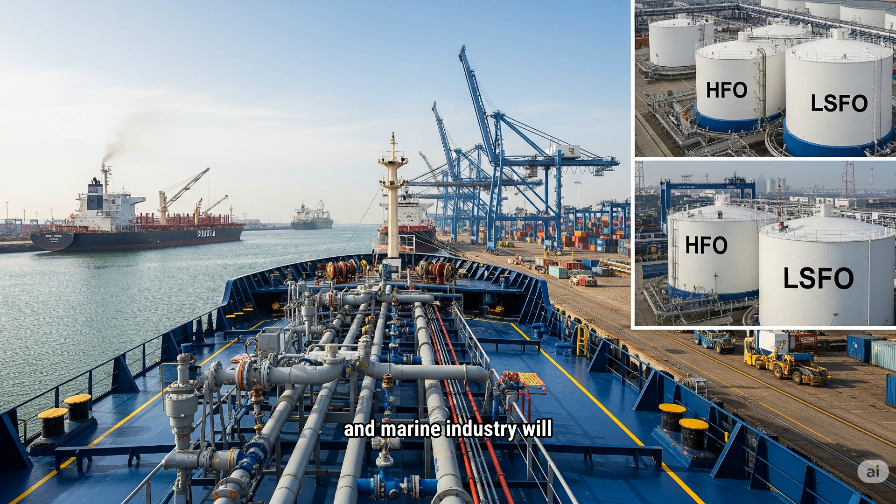The marine industry will go into a major change sooner or later, as a response to the continuous change of environmental rules and regulations. Therefore, the marine industry, among other industries, must respond and adapt to the changing and stricter regulations and become more efficient with regard to fuel consumption and emissions.

Many companies are researching and developing new types of fuels in liaison with engine manufacturers and shipyards. Some engine manufacturers strive to adapt and retrofit their existing engines to the new fuels when possible, as it proves more economically practical. However, new-built vessels will have to be equipped with newly designed and versatile engines, which can use dual fuels or new different types of fuels.

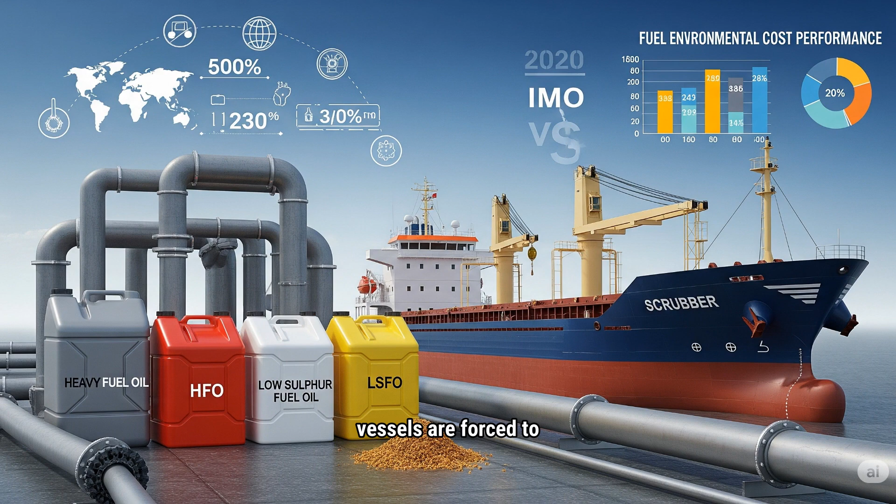After the 2020 sulfur cap compliance regulation, all conventional vessels are forced to use HFO plus scrubber or LSFO, and these fuels perform well on most parameters. There were some concerns about the availability of these fuels after 2020, but they are still significantly more available than alternative fuels. The primary disadvantage of these fuels is their low environmental performance.

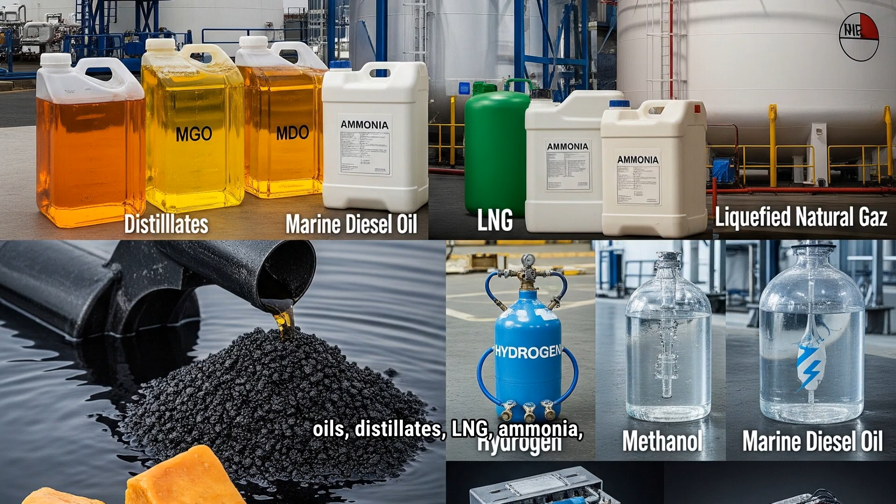Marine fuels comprise heavy fuel oils, distillates, LNG, ammonia, hydrogen, methanol, fuel cells, and others. In the case of distillates, a distinction is made between marine gas oil, MGO, and marine diesel oil, MDO. Residual fuel oil accounts for the vast majority of fuel oil used by the world's merchant fleet.

This also applies to the vast majority of large diesel engines used on land. By definition, residual fuel oils are byproducts of refinery processes that remain after the distillate or lighter fractions have been removed. These residues are complex mixtures that vary depending on the source of the crude oils processed.

Scrubbers incur high investment and operating costs, but these are negligible in comparison to the costs of alternative fuels.

Fuel oil was initially derived from the residue of the atmospheric or vacuum distillation process in the early days of refining. By and large, the product entering the market for fuel oil was of consistent quality, with few issues.

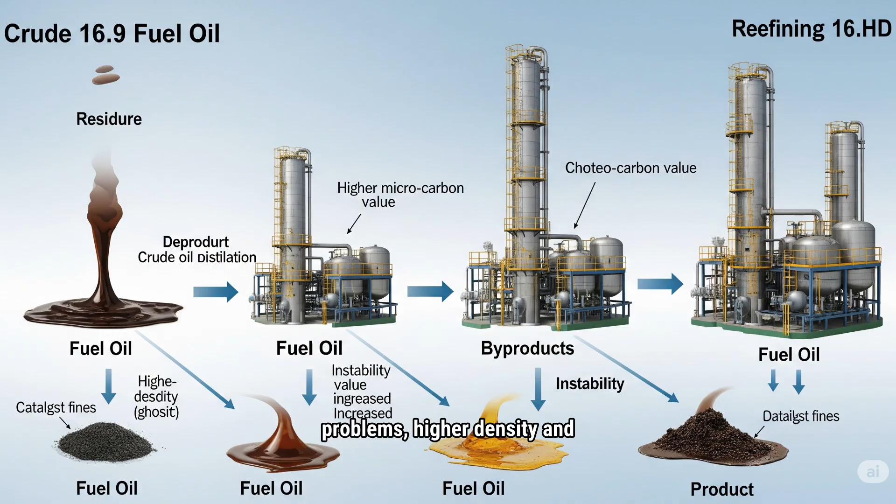As demand for distillate products increased, refiners implemented secondary refining processes, altering the market characteristics of fuel oil. These secondary refining processes have side effects like a lesser amount of residual fuel, higher microcarbon value, stability and sediment problems, higher density, and catalyst fines contamination problems.

Individual country-specific product demand is extremely diverse and cannot be met solely through crude oil selection due to the sheer volume required. Additionally, within a single geographical area, a variety of crude oil sources and refinery process configurations are used. As a result, fuel for industrial and marine markets exhibits considerable variation in its properties on a global scale. While this has been the case throughout history, the variations can be more pronounced than in the past.

The first step in the manufacture of petroleum products is the atmospheric distillation of crude oil into its major fractions. When crude oil is heated, the lightest, most volatile hydrocarbons evaporate first, followed by the heaviest, least volatile hydrocarbons. After cooling, the vapors are condensed back into liquids.

A fractionating column is used to carry out this distillation process. The column is divided into chambers by perforated trays that condense the vapors and allow the liquids to flow into storage tanks at each stage. The crude oil is preheated to a maximum of 350 degrees to avoid thermal cracking.

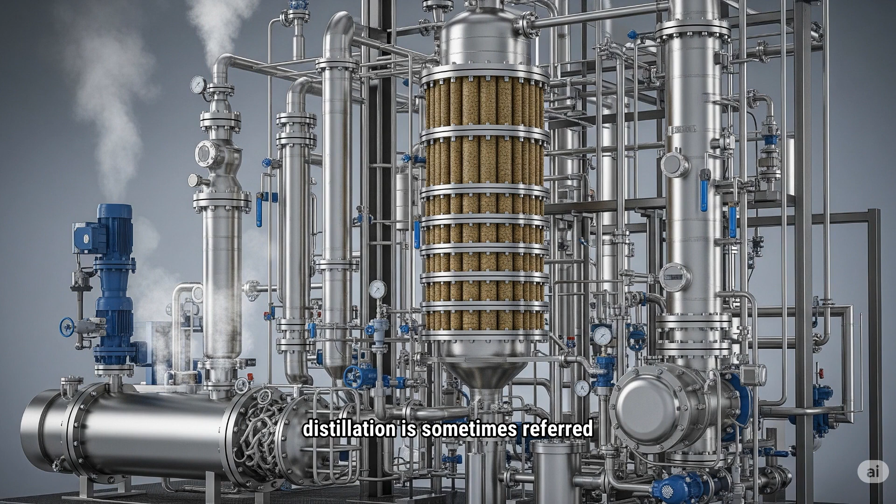The residue from atmospheric distillation is sometimes referred to as long residue, and additional distillation at reduced pressure and high temperature is used to recover more distillate product. This vacuum distillation process is critical for optimizing crude oil upgrading.

The vacuum distillation residue, sometimes referred to as short residue, is used as feedstock for further processing or as a component of a fuel. Unlike the fractionating column used in atmospheric distillation, the low-pressure vapors are condensed using a system of packed beds rather than trays.

Refineries that rely solely on atmospheric and vacuum distillation are referred to as straight-run refineries, and the fuel oil produced is essentially either long or short-run residue. The residue percentage varies according to the composition of the crude processed.

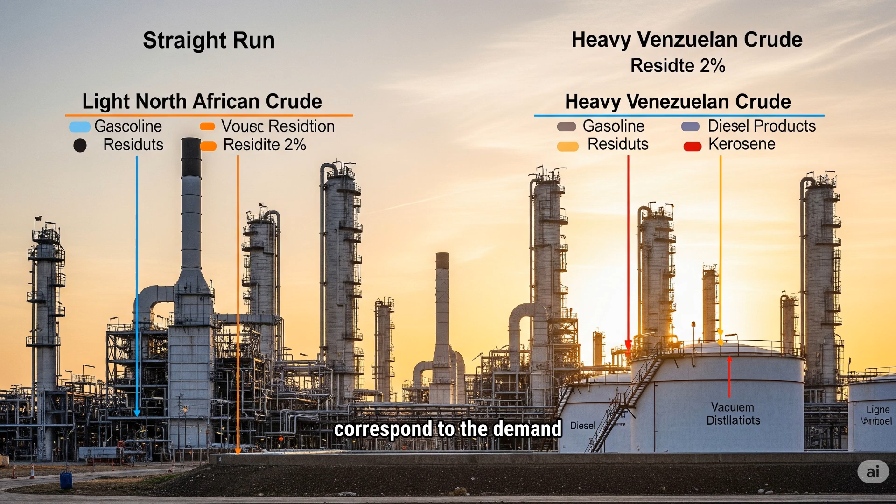The residue is 28% for a typical light North African crude and up to 85% for a heavy Venezuelan crude. The proportion of products produced does not always correspond to the demand for them and is largely determined by the crude oil. Here is an illustration of a typical refinery process.

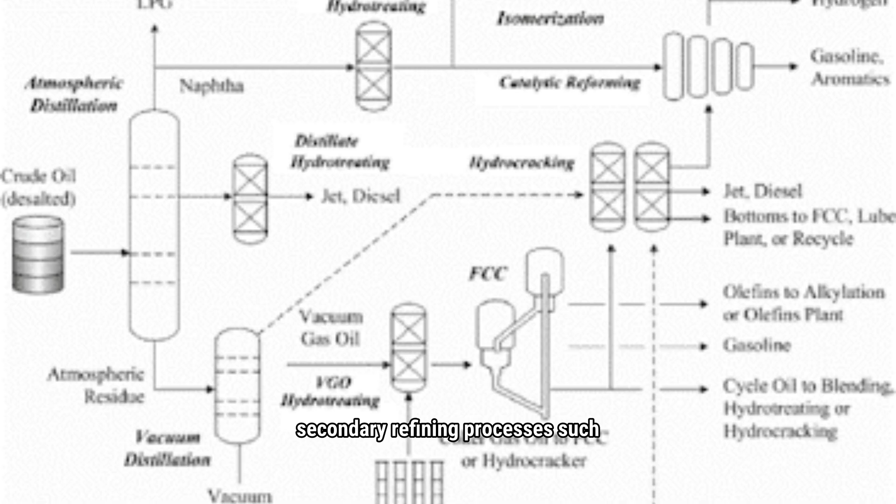Additional refining processes were introduced to meet product demand. Apart from atmospheric and vacuum distillation, a modern refinery may also include secondary refining processes such as cracking, which may be thermal or catalytic.

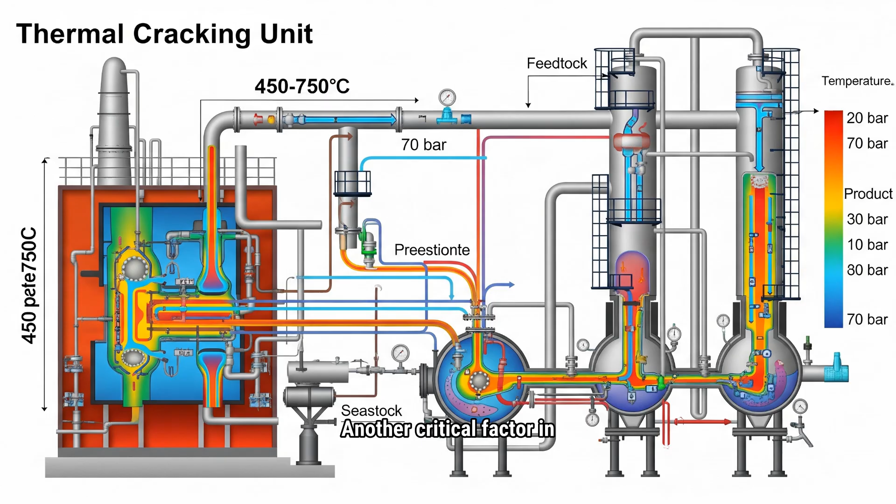Thermal cracking is the oldest and, in theory, the simplest method of refinery conversion. It is carried out at temperatures ranging from 450 to 750 degrees C and pressures ranging from atmospheric to 70 bar. Temperature and pressure are determined by the type of feedstock and the desired product. At these elevated temperatures, the large hydrocarbon molecules become unstable and self-destruct. Another critical factor in the process is the length of stay.

The thermal cracking process has three primary applications in modern refineries: visbreaking, thermal gas oil units, and coking. Visbreaking is the most critical process in the production of residual fuel oil.

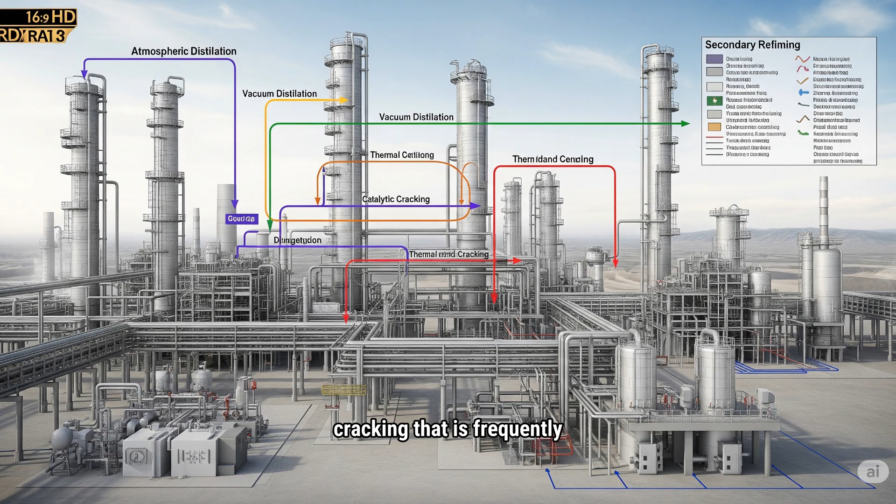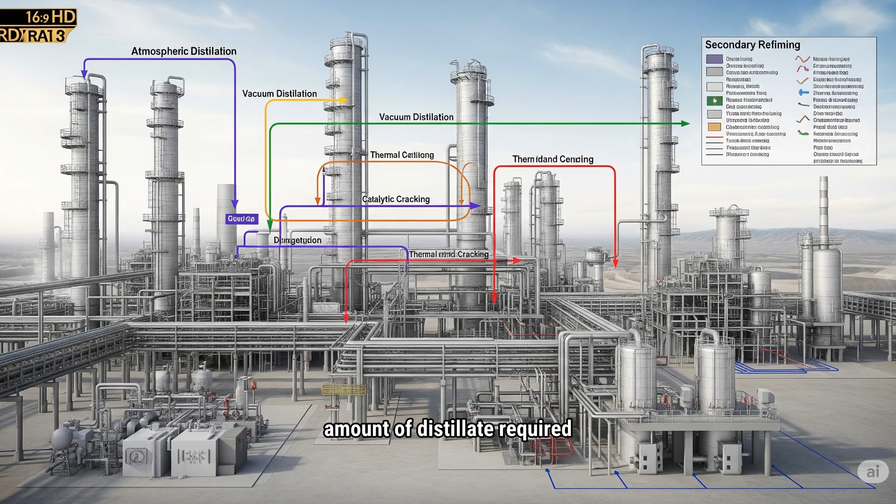It is a relatively mild type of thermal cracking that is frequently used to reduce the viscosity of straight-run residual fuels. Typically, such fuels are extremely viscous and must be blended with a relatively high-value distillate to meet the finished product specification. Visbreaking significantly reduces the amount of distillate required as diluent or cutter stock, which can then be diverted to a more profitable product stream.

A thermal gas oil unit's primary objective is to produce and recover the maximum amount of gas oil possible. In extreme cases, the residue's viscosity may exceed that of the feedstock.

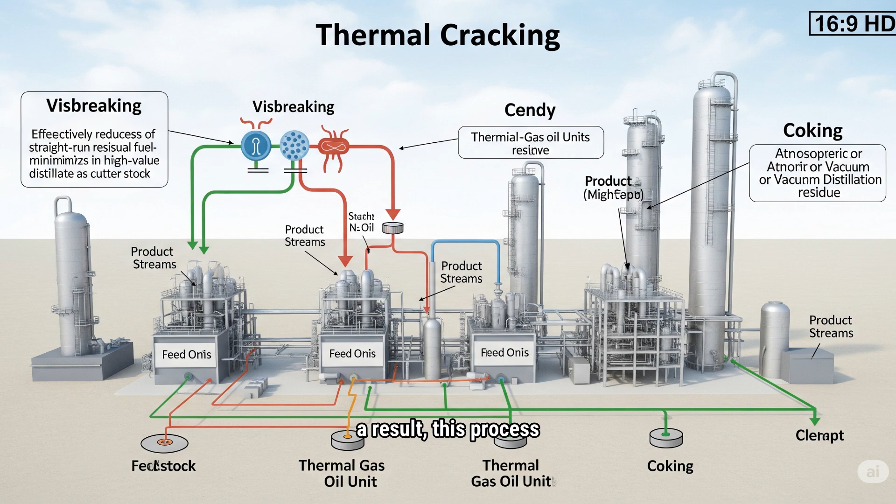Coking is a form of thermal cracking that is quite severe. It is intended for the conversion of straight-run residues to more valuable products such as naphtha and diesel oil. Additionally, gas and coke are produced, and as a result, this process is not used in the production of residual fuel oils.

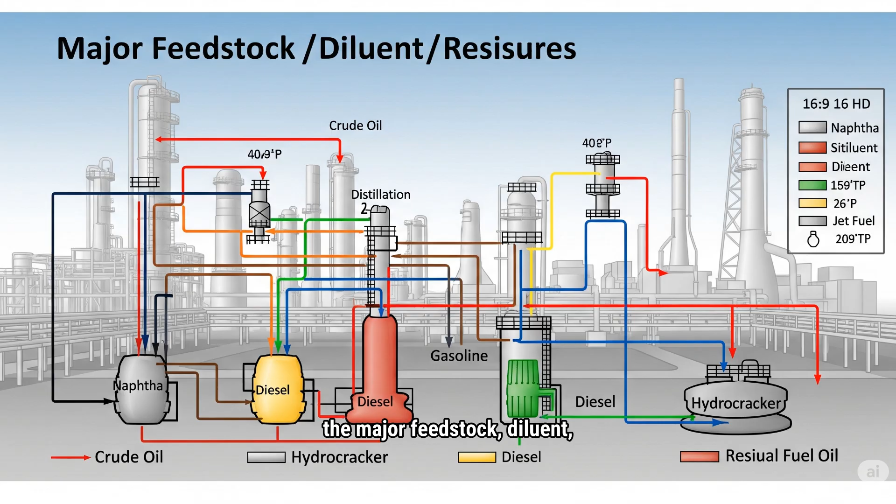There are numerous residues and diluents available in a modern refinery for the production of fuel oil. Typically, the fuel is made up of visbroken residue that has been diluted with cycle oils and trace amounts of other distillates. Here, the figure depicts the major feedstock, diluent, and residue streams in a modern refinery.

The British Standard Institute was the first to issue a specification for ship fuels in 1982, BSMA 100. It was developed collaboratively by suppliers and engine manufacturers with quality and price trade-offs.

The International Maritime Organization, IMO, initiated ISO 8217 Petroleum Products, Fuel, Class F, in 1987, which has since become the general standard. The standard makes a distinction between residue fuels - RMA, RMB, RMC, RMK - and distillates - DMX, DMA, DMB, and DMC. It categorizes residue fuels based on viscosity and establishes class-specific limits, maxima for density, flash point, pour point, carbon residue, water, ash content, and sulfur content.

Viscosity classes are defined as viscosity values of 30, 80, 180, 380, and 700 mm²/s at 50°C.

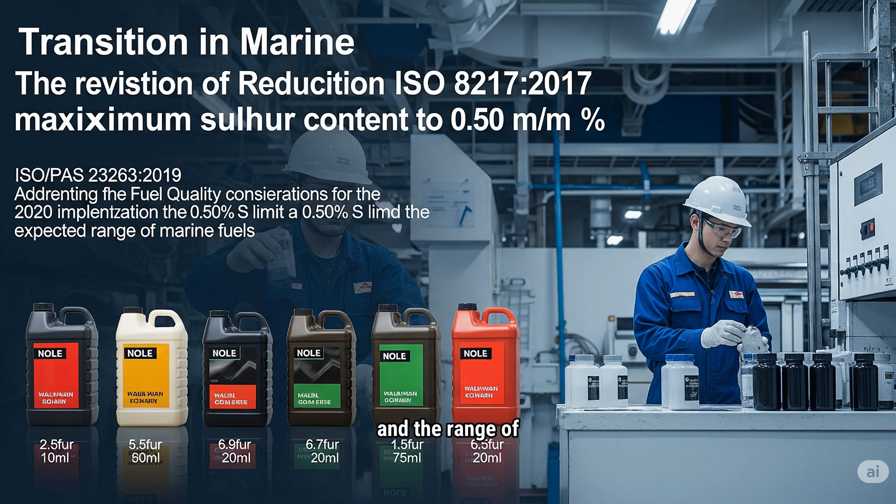As it was anticipated that the reduction of the maximum sulfur content of marine fuels to 0.50 mass% would lead to a transition in the nature of marine fuels, a revision of ISO 8217-2017 was not possible by 1 January 2020. ISO PAS 23263-2019 was developed to address fuel quality considerations in view of the implementation of the maximum 0.50% sulfur limit in 2020 and the range of marine fuels expected to be placed on the market.

ISO PAS 23263-2019 addresses general considerations on the sulfur content and flash point of 0.50 mass% sulfur fuels, the application of ISO 8217:2017 to these fuels, but also specific considerations which may apply to some of these fuels. In particular, kinematic viscosity, catalyst fines, stability, cold flow properties, wax formation, and ignition characteristics are addressed.

As it was expected to see a higher variety of fuel blend formulations as of January 2020, and although compatibility is not a specification within ISO 8217, ISO PAS 23263-2019 provides information on how to minimize the risk of incompatibility between fuels when commingling onboard is unavoidable, and how to evaluate compatibility.

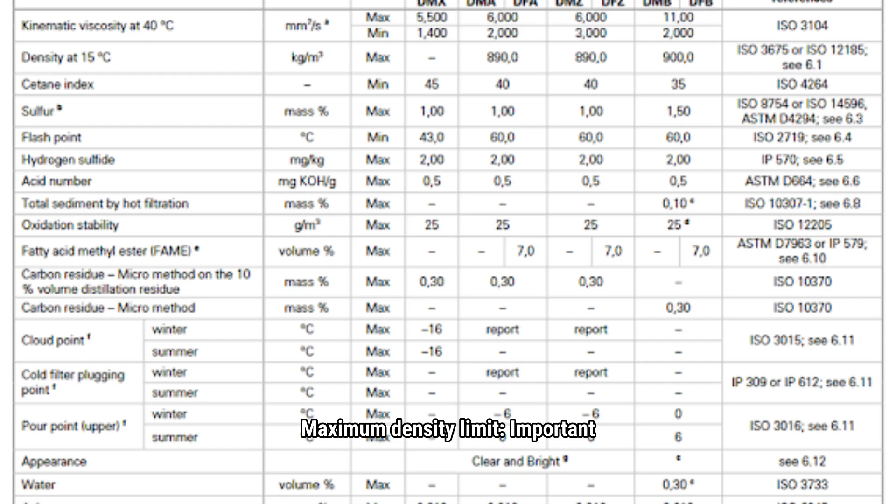Important specifications to ensure reliable engine operation with residual fuel are: maximum density limit, important for classical purifier operation and to ensure satisfactory ignition quality for low viscosity fuel grades; and maximum aluminum and silicon (Al+Si) limit.

In a complex refinery, HCO is used as a blending component. Mechanically damaged aluminum silicate catalyst particles of the catalytic cracker are not completely removed from the HCO stream and are found in mg/kg amounts in heavy fuel blended with HCO. In order to avoid abrasive damage in the fuel system onboard the vessel, it is necessary to limit the amount of Al+Si to a level which can be adequately removed by the ship's fuel cleaning system.

Maximum total sediment aged limit: the stability of asphaltenes is deteriorated by the visbreaking process, and instability problems can cause fuel purification and filter blocking problems, hence the need for a specification to ensure adequate fuel stability.

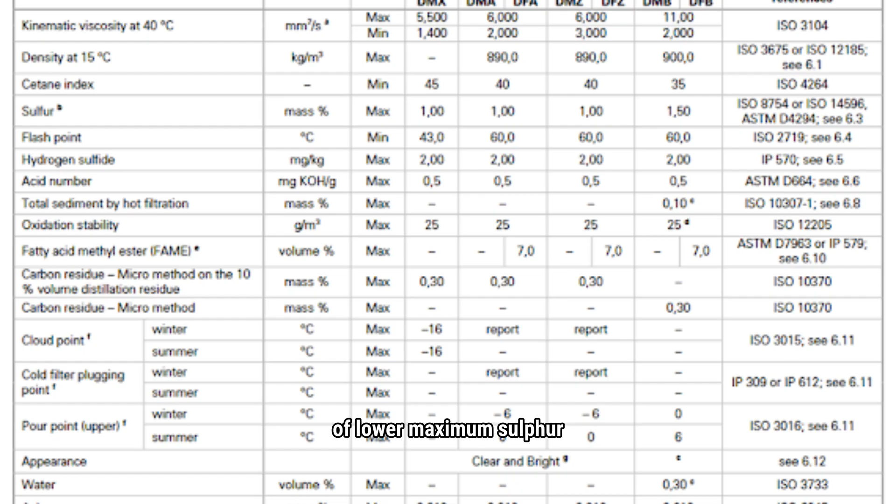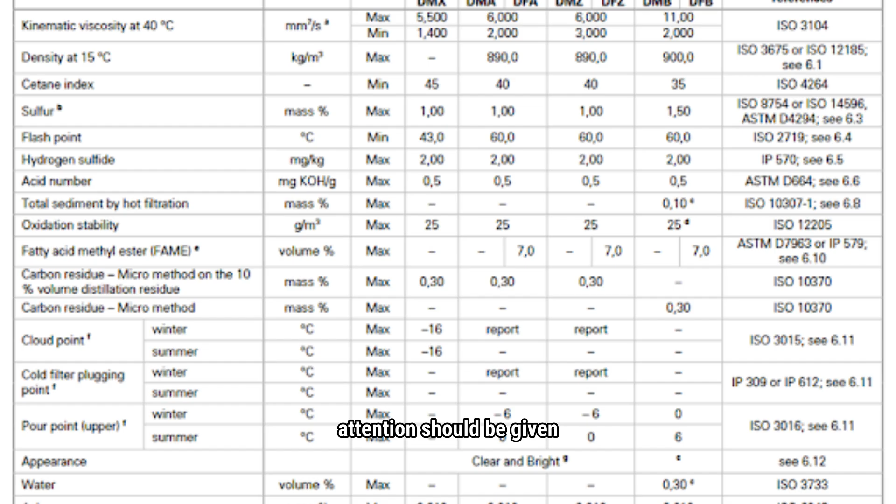With the introduction of lower maximum sulfur limits, more paraffinic product streams are used for the blending of these fuels, especially for low viscosity 0.50% sulfur residual type fuels. Attention should be given to the cold flow properties of the fuel intended to be used for a particular voyage.

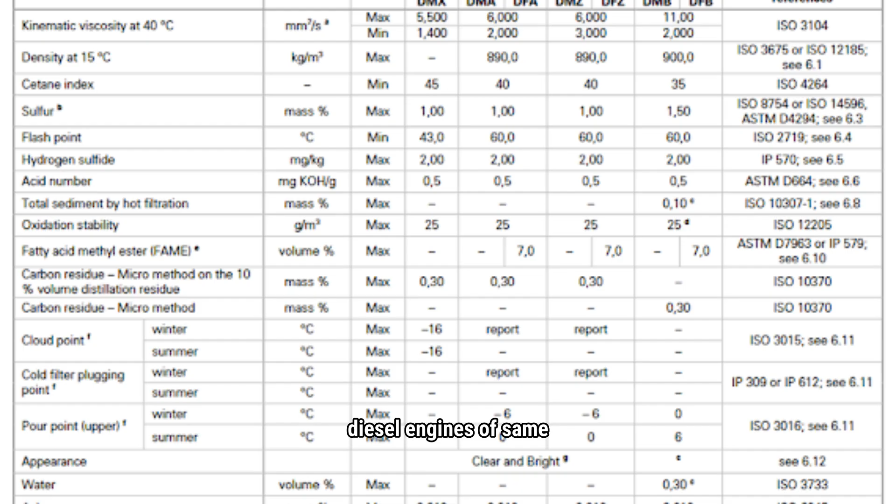The ISO 8217-2017 specifications can also be applicable to fuels for stationary diesel engines of same or similar make as those used for marine purposes. The most important marine fuel properties listed under ISO 8217-2017 are catalyst fines.

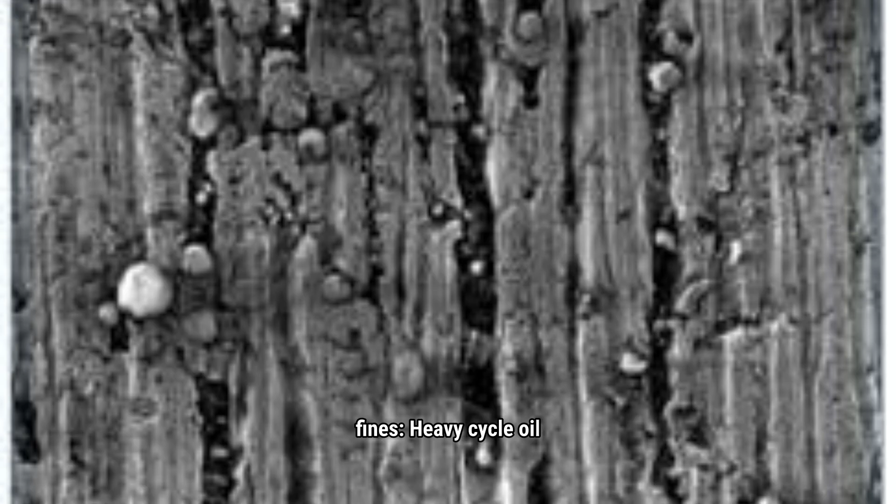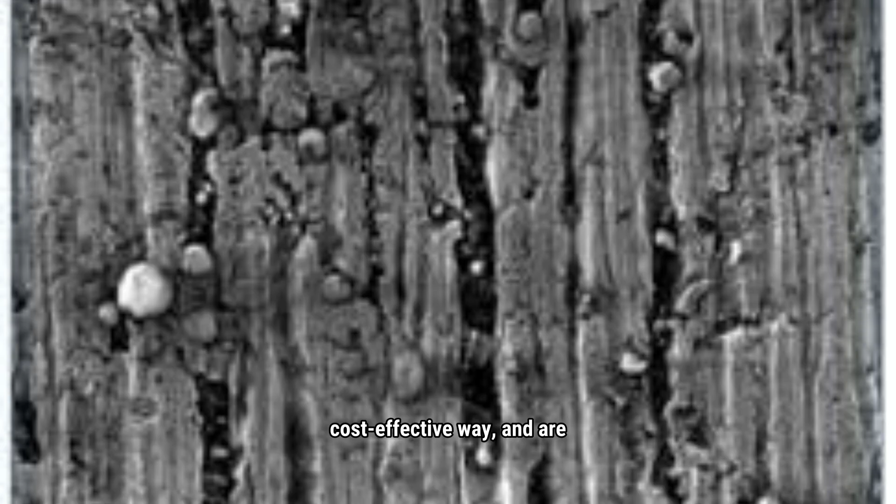Heavy cycle oil is used worldwide in complex refining as a blending component for heavy fuel. Mechanically damaged catalyst particles, aluminum silicate, cannot be removed completely in a cost-effective way, and are found in blended heavy fuel. Fuel pre-cleaning onboard ships has a removal efficiency of approximately 80% for catalyst fines.

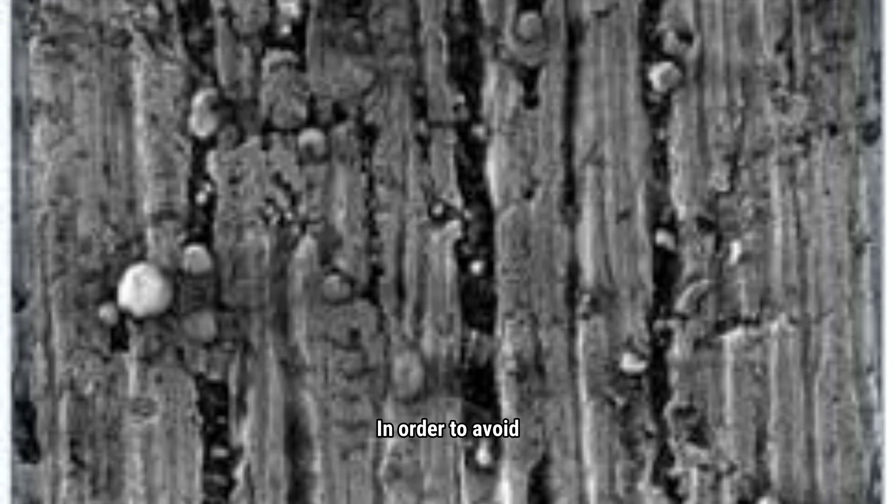In order to avoid abrasive wear of fuel pumps, injectors, and cylinder liners, the maximum limit for Al+Si is 60 mg/kg for RMG and RMK category fuels since 2010.

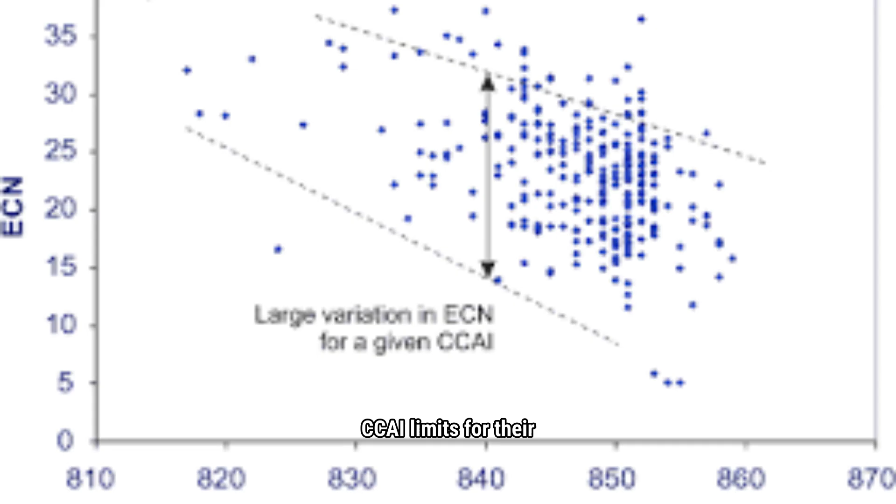CCAI, the Calculated Carbon Aromaticity Index, is only applicable to residual fuel oils and provides an indication of the ignition delay of a fuel oil. The CCAI is calculated from the density and viscosity of a residual fuel oil. Some engine manufacturers specify CCAI limits for their engines, depending on engine type and application.

Ash. The ash content is a measure of the inorganic incombustible components present in the fuel, either as inherent to the fuel or as contamination.

Carbon residue is determined by a laboratory test performed under specified reduced air supply. It does not represent combustion conditions in an engine. It gives an indication of the amount of hydrocarbons in the fuel, which have difficult combustion characteristics, but there is no conclusive correlation between carbon residue figures and actual field experience. The microcarbon residue method is specified by ISO 8217.

Acid number. All fuels have a naturally occurring acid number. However, fuels with high acid numbers arising from acidic compounds can cause accelerated damage to large diesel engines, especially the fuel injection equipment. However, fuels manufactured from naphthenic crudes can have an acid number exceeding the maximum specified in ISO 8217-2017 but still be acceptable for use. Currently, no identified correlation between the acid number of a fuel oil and its corrosivity exists.

Cetane number. Cetane index is only applicable for gas oil and distillate fuels. It is a measure for the ignition quality of the fuel in a diesel engine. The higher the RPM of the engine, the higher the required cetane index. The cetane index is an approximate calculated value of the cetane number, based on the density and the distillation of the fuel. The cetane index is not applicable when cetane improving additives have been used.

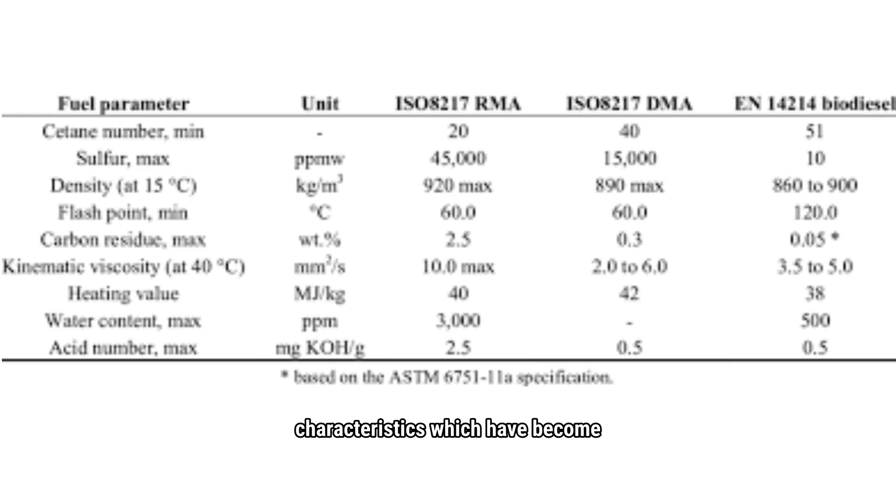Therefore, ISO 8217-2017 requires for winter grades of DMA, DFA, DMZ, and DFZ the cloud point and cold filter plugging point to be reported. The International Council on Combustion Engines, CIMAC, has developed a guideline on cold flow properties of marine fuel oils. This guideline aims to provide ship's crews with a better understanding of a fuel's cold flow characteristics, which have become more important but are often overlooked when storing and handling distillate fuels.

Density. The official unit is kg/m3 at 15 degrees C, while kg/l at 15 degrees C is the most commonly used unit. Density is used to calculate the quantity of fuel delivered. The density gives an indication of the ignition quality of the fuel within a certain product class.

This is particularly the case for the low viscosity IFOs. The product density is important for the onboard purification of the fuel. The higher the density, the more critical it becomes.

Kinematic viscosity is a measure of the fluidity of the product at a certain temperature. The viscosity of a fuel decreases with increasing temperature. The viscosity at the moment the fuel leaves the injectors must be within the limits prescribed by the engine manufacturer to obtain an optimal spray pattern.

Viscosity outside manufacturer's specifications at the injectors will lead to poor combustion, deposit formation, and energy loss. The viscosity of the fuel must be such that the required injection viscosity can be reached by the ship's preheating system. For distillate marine fuels, most large diesel engine builders request a minimum viscosity of the fuel before the fuel injection pump of about 2.0 mm2/s cSt.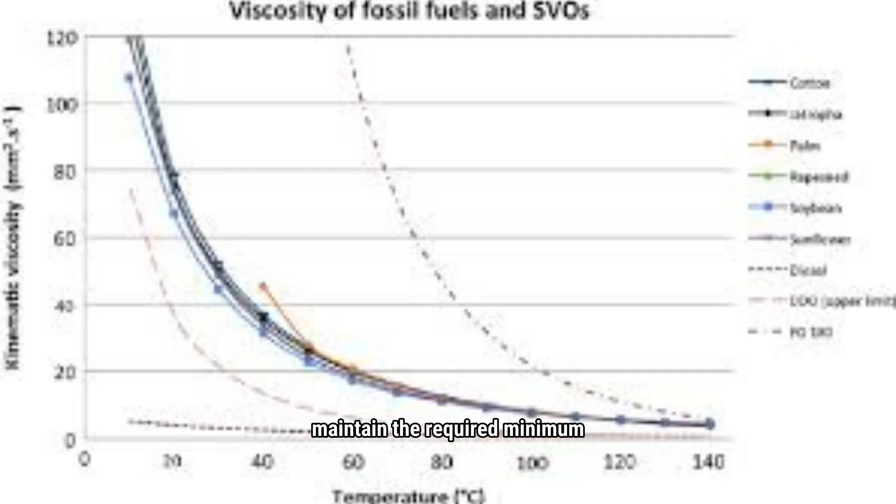Hence, for distillate marine fuels with a minimum viscosity of 2.0 mm/s CST at 40 degrees C, according to the ISO 8217-2017 standard, cooling or chilling may be required to maintain the required minimum viscosity before the fuel injection pump.

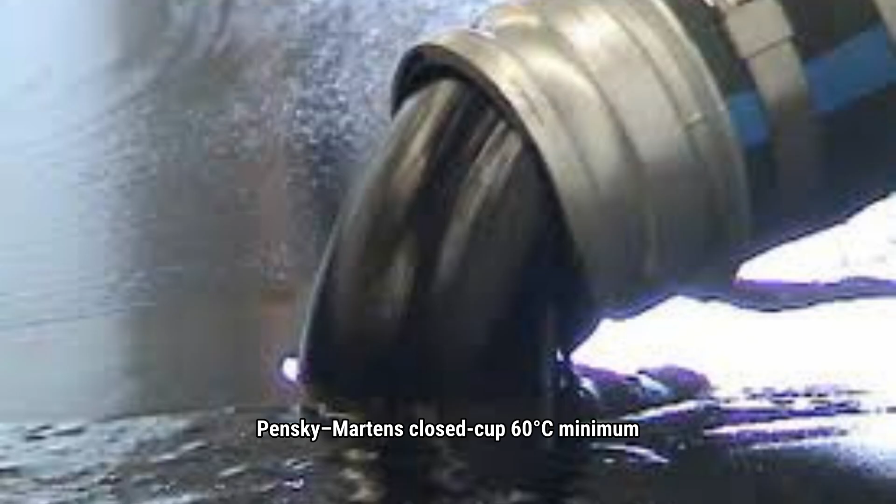Flash point is the temperature at which the vapors of a fuel ignite, under specified test conditions, when a test flame is applied. The flash point for all fuels to be used in bulk onboard vessels is set at Pensky-Martens closed cup, 60 degrees C minimum, per the SOLAS agreement.

DMX, a special low cloud point gas oil, may only be stored onboard in drums because of its flash point below 60 degrees C.

Pour point is the lowest temperature at which a fuel will continue to flow when cooled under specified standard conditions. Straight-run heavy fuels have a pour point typically in the plus 30 degrees C range, while high-sulfur bunker fuels from a complex refinery generally have pour points below 0 degrees C, in the range of minus 10 to minus 20 degrees C.

This can lead to problems if a vessel receives high pour, straight-run bunker fuel, and the bunker fuel tanks are not completely, or only before the fuel transfer, heated.

With the introduction of lower maximum sulfur limits, more paraffinic product streams are used for blending marine fuels with a maximum sulfur content of 0.50%, and these can therefore have a higher pour point as well.

Vanadium and nickel are elements found in certain heavy fuel oil molecules, asphaltenes. Upon combustion, vanadium oxides are formed, and some have critical melting temperatures. The most critical are the double oxides, sulfates with sodium. Some countries have implemented maximum nickel concentrations for inland use of heavy fuel.

The elements calcium, zinc, and phosphorus are considered fingerprint elements of used lubricating oil.

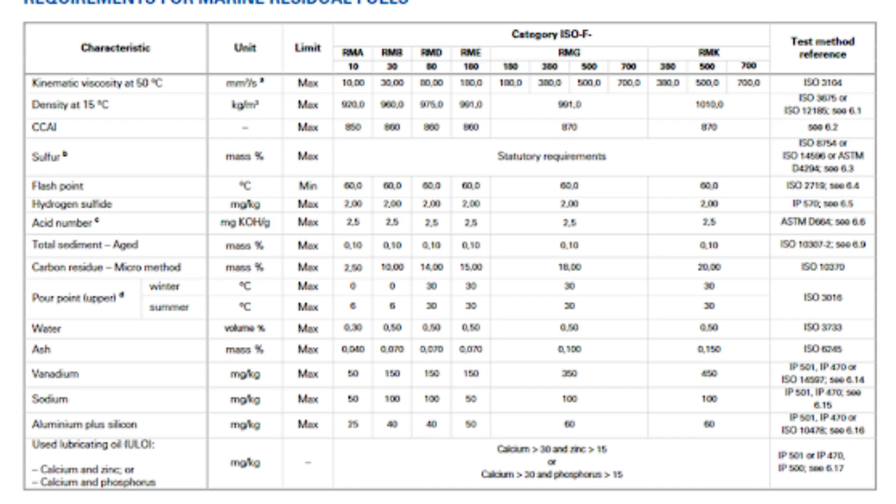If after purification the water content remains too high, water vapor lock can occur and pumps can cut out. If water-contaminated fuel reaches the injectors, combustion can be erratic. Water in fuel that remains standing in lines for a longer period can cause corrosion.

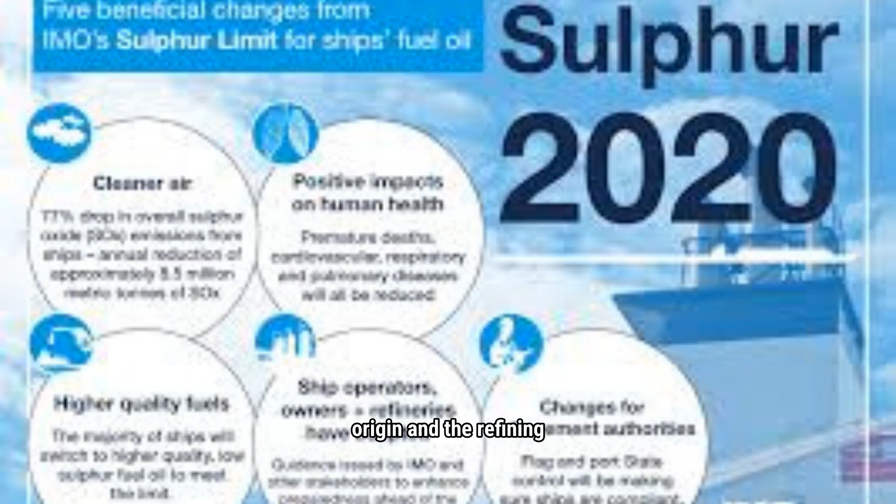The sulfur content of a marine fuel depends on the crude oil origin and the refining process. When a fuel burns, sulfur is converted into sulfur oxides. These oxides reach the lubricating oil via the blow-by gas, and are corrosive to engine piston liners, so they must be neutralized by the cylinder lubricant.

Marine engine lubricants are developed to cope with this acidity. If the correct lubricant is used, the sulfur content of a marine fuel is technically not important, but may have environmental implications.

Since the early 2000s, regulations to reduce emissions from shipping have been in place and have been tightened over the years. The increasing restrictions on marine fuel sulfur content have shifted the primary blend target of marine fuels from viscosity and density to sulfur.

MARPOL Annex VI, first adopted in 1997, limits the main air pollutants contained in ships' exhaust gas, including sulfur oxides, SOx, and nitrogen oxides, NOx. In 2008, the revised Annex VI to MARPOL 73/78 was adopted and required the sulfur content of any fuel used onboard ships not to exceed 3.50 mass percent as of 1 January 2012.

The revised Annex 6 also restricted the sulfur content of fuel oil used on board ships operating within an emission control area, ECA, to 0.10 m/m% as of 1 January 2015. The revised Annex 6 also included the requirement to further restrict the sulfur content to 0.50 m/m% on and after 1 January 2020. However, a provision was adopted, requiring IMO to review by 2018 the availability of 0.50 m/m% fuel oil for use by ships, to determine whether the new lower global limit on sulfur emissions from international shipping should come into effect on 1 January 2020 or be deferred until 1 January 2025.

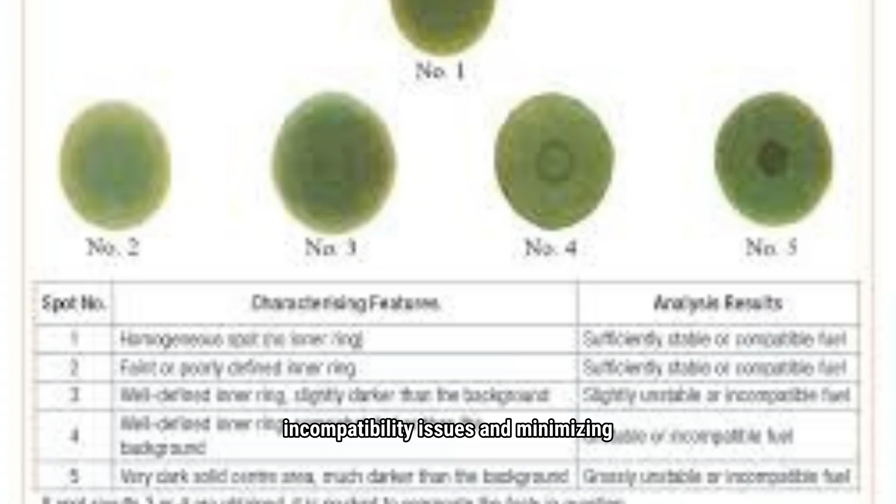The Joint Industry Guidance on the Supply and Use of 0.50% Sulfur Marine Fuel, published in 2019, provides additional information and guidance on avoiding incompatibility issues and minimizing the risks of commingling potentially incompatible fuels.

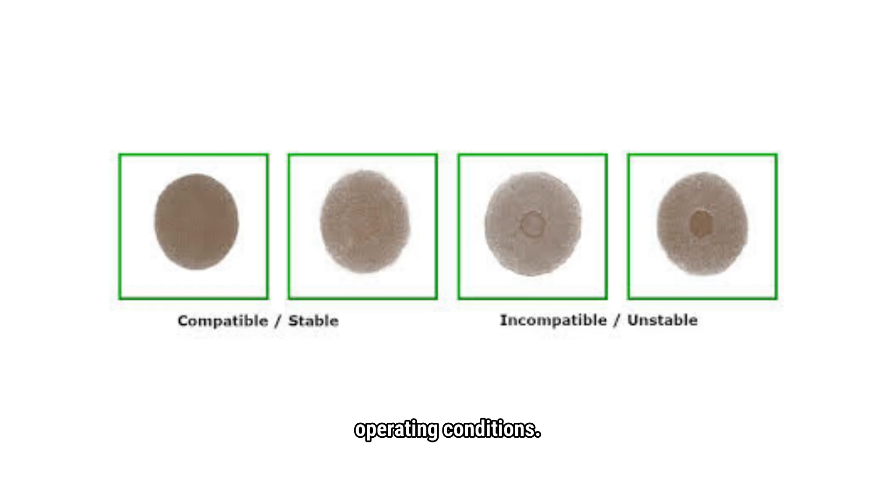The stability of a residual fuel is defined by its resistance to precipitate asphaltenic sludge despite being subjected to forces, such as thermal and aging stresses, while handled and stored under normal operating conditions. Compatibility is defined as the ability of two or more fuels to be commingled at a defined ratio without evidence of material separation, e.g. sludge formation.

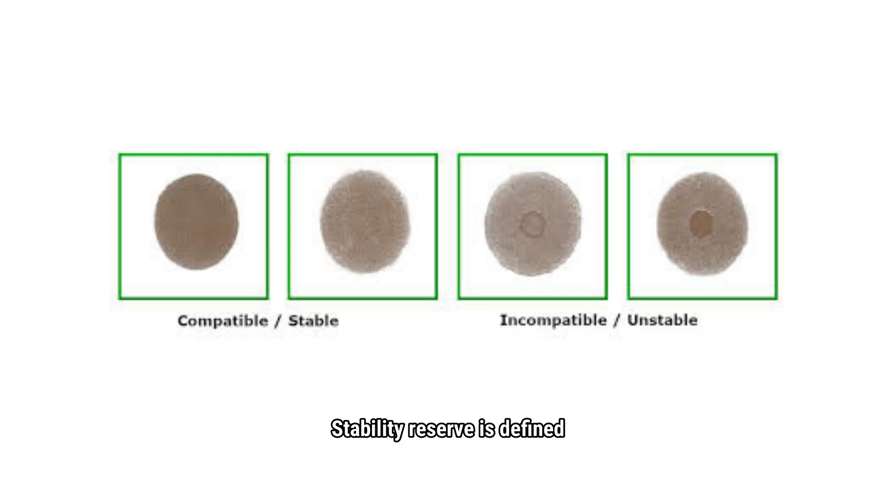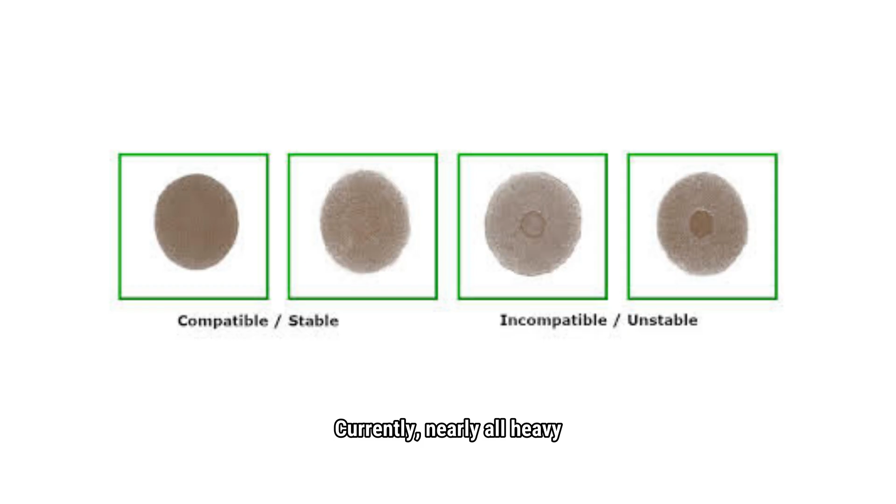Stability reserve is defined as the ability of an oil to maintain asphaltenes colloidally dispersed and to prevent flocculation of the asphaltenes. Total sediment aged is an important specification for heavy fuels. Currently, nearly all heavy fuel is marketed with the stability guarantee of a maximum total sediment aged, ISO 10307-2, of 0.10%. Stratification in heavy fuel oil tanks is minimal when this specification is met.

CIMAC, the International Council on Combustion Engines, has published a guideline on marine fuel handling in connection to stability and compatibility. This guideline aims to provide a practical and working understanding of the definition of stability and compatibility of marine fuel oils and how these two specific fuel properties may be best managed in the supply chain and onboard ships. It complements and expands on the information given in ISO PAS 23263:2019.